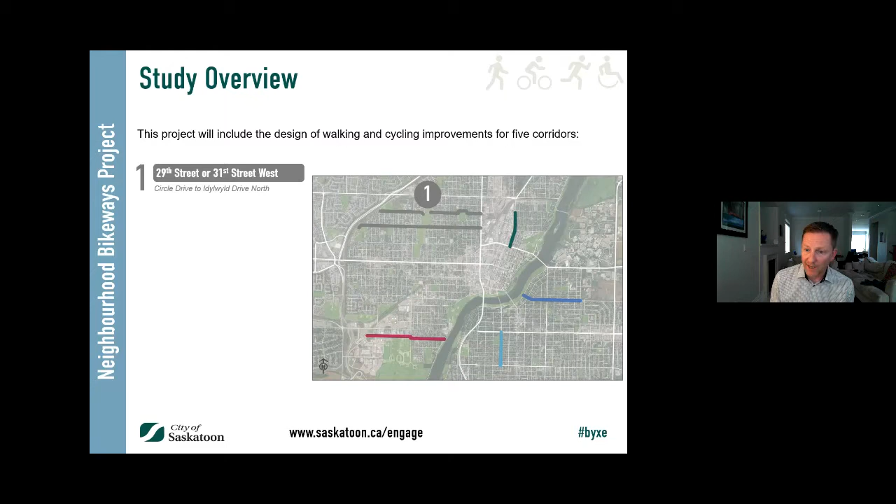The overall Neighbourhood Bikeways project includes 5 corridors that were identified. They include 29th Street or 31st Street West from Circle Drive to Idylwyld Drive, Dudley Street, the subject of tonight's event, from Dawes Avenue to Spadina Crescent, 3rd Avenue North from 25th Street East to 2nd Avenue North, 14th Street East from Saskatchewan Crescent to Cumberland Avenue, and Victoria Avenue from 8th Street to Taylor Street East, which is being designed by city staff.

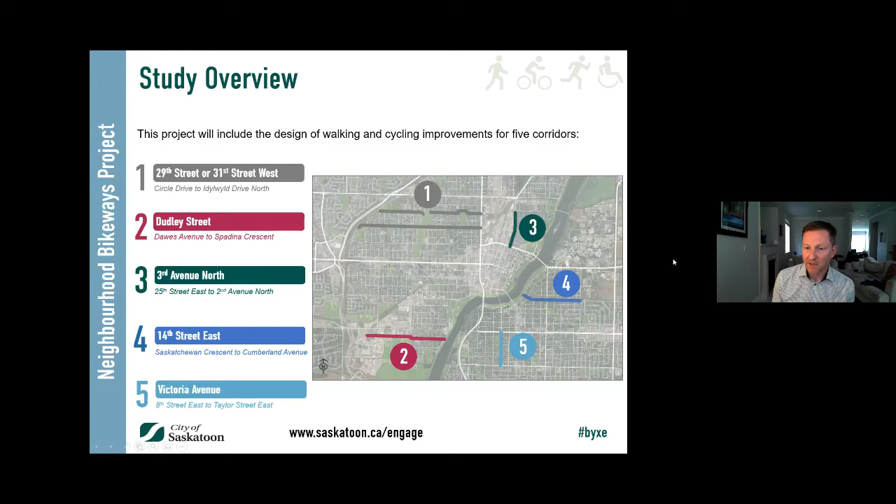So we are starting with the Dudley Street corridor through this process, and we will be proceeding with engagement on the other corridors based on feedback received tonight from this event over the next month or so.

This study is being completed through 5 phases of work, including a review of existing conditions and public engagement conducted in the spring, February and March, to obtain input on concerns and key considerations. Based on that input, we've developed conceptual designs for each of the neighborhood bikeways, which is now complete. The purpose of this open house is to present the recommended concept for the Dudley Street corridor and to answer any questions you may have.

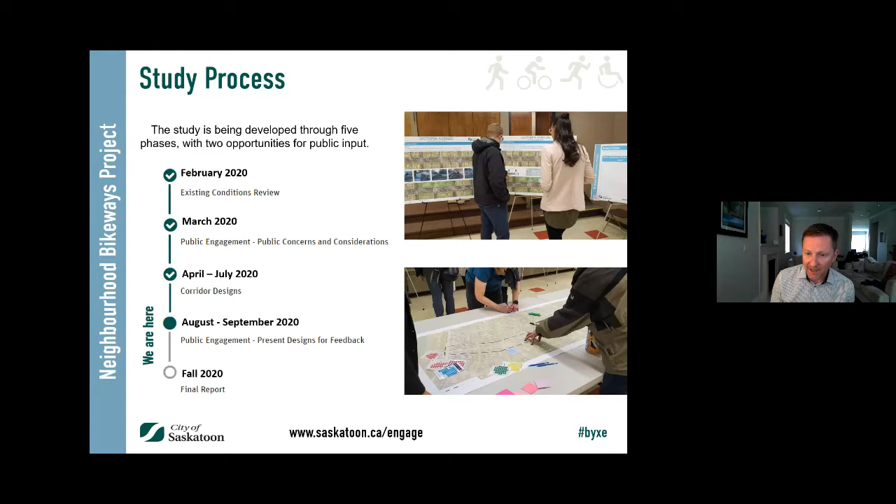Through the Neighbourhood Bikeways Project, we're looking at what we're calling all ages and abilities cycling facilities, or AAA cycling facilities. These facilities are intended to be safe and comfortable for all people walking and cycling, regardless of their age and ability. There are 3 types considered for each study corridor: protected bike lanes, multi-use pathways, and neighborhood bikeways. I'll explain the features of each on the next slides.

Protected bike lanes and multi-use pathways provide a physical separation between motorists and people cycling, which allows for safe and comfortable cycling even when traffic volumes and speeds are high. Protected bike lanes are typically used when physical separation is required because traffic speeds and volumes cannot be reduced adequately to provide an all ages and abilities facility. Multi-use pathways are typically built within parks, utility corridors, greenway corridors, or other locations where on-street cycling facilities are not suitable or desired.

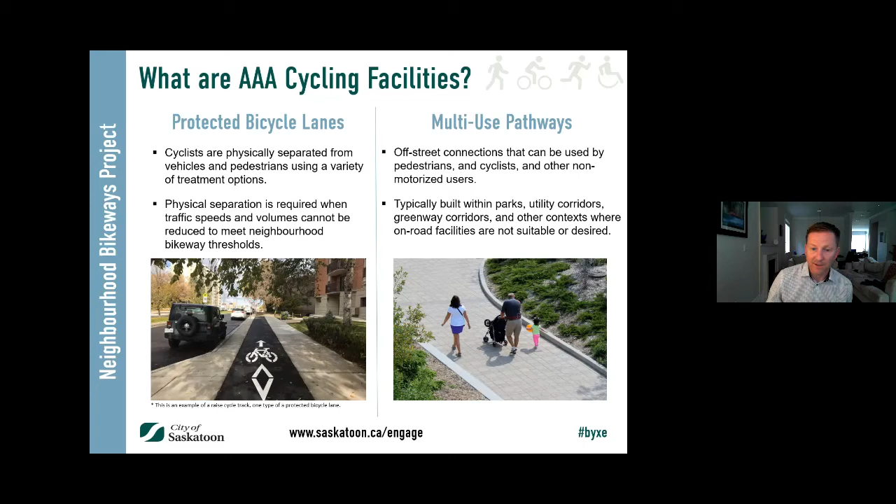Neighborhood bikeways are all ages and abilities facilities where design treatments are used to ensure low traffic volumes and speeds so that people walking and biking are more comfortable. Depending on existing traffic speed and volume, traffic calming measures may be required. Neighborhood bikeways do not typically impact on-street parking, as is the case with the Dudley Street corridor. I'll be discussing some of the design treatments for neighborhood bikeways throughout the presentation as we discuss the key considerations and design features of this corridor.

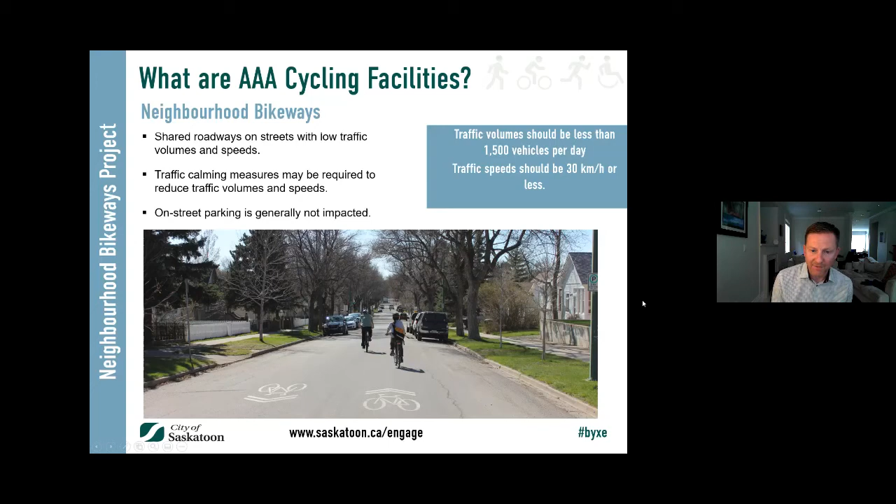I'll start with a summary of existing conditions of the Dudley Street corridor. Dudley Street runs east-west between Dawes Avenue and Spadina Crescent, providing an important connection between the Meewasin Trail and the multi-use pathway on Dawes Avenue, which connects to 11th Street West, a parallel east-west corridor just north of Dudley Street. This corridor provides important connections including to the Gordie Howe Sports Complex, St. John School, and the industrial employment areas.

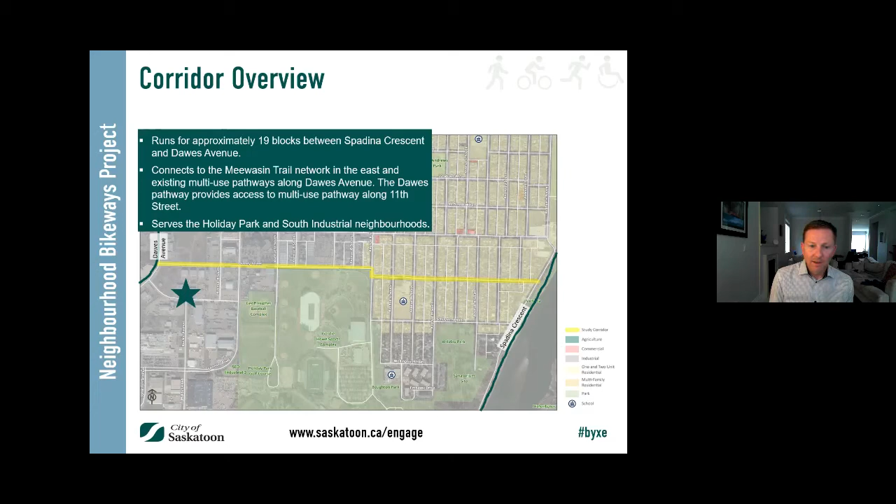The next slide summarizes some existing conditions along the corridor for pedestrians, transit, and on-street parking. The top map shows that much of the corridor today does not have sidewalks, so there's an important opportunity to improve conditions not only for people cycling but also for people walking. There are multi-use pathways found on both ends, on Dawes and Spadina with the Meewasin Trail, so this provides a great opportunity to connect those two existing multi-use pathways.

The middle map shows transit along the corridor and recognizes there's one transit route that runs westbound for a small section between Avenue P and Avenue W. Finally, the bottom map shows existing on-street parking utilization along the corridor. Parking is currently allowed on both sides of the street throughout the corridor, and we found that parking utilization is generally low throughout the corridor during most times of day.

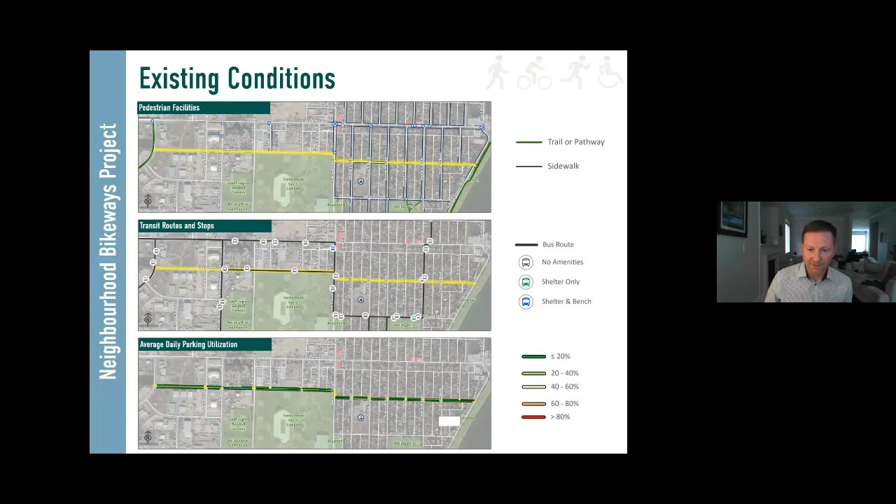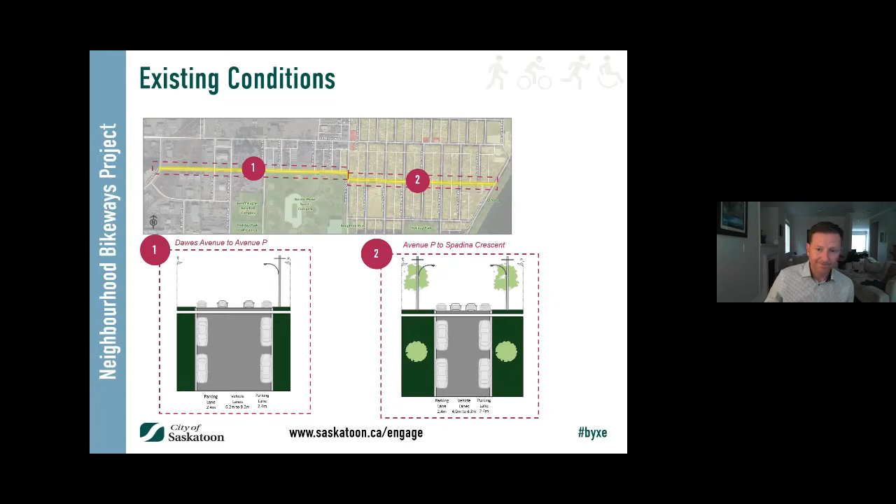Through the first round of engagement, we asked a number of questions from the public, including identifying opportunities and challenges and what could be improved along the corridor. Some of the themes we heard included opportunities for multi-use pathways and sidewalks to improve pedestrian safety, improved road surface conditions, more street trees, more lighting, better snow removal, better signage, and improved connections to Montgomery via the 11th Street West multi-use pathway.

And I'm seeing, I'm having some connection issues with my screen here. So, just see if I can switch my camera.

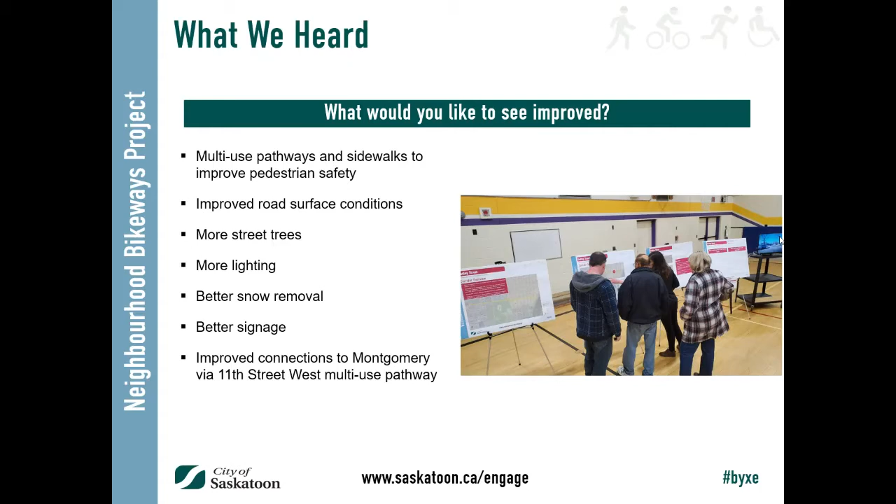Here we go. Okay, so in terms of the recommended concept, based on what we heard throughout the first round of engagement, we're recommending distinct features for the western and eastern ends of the corridor.

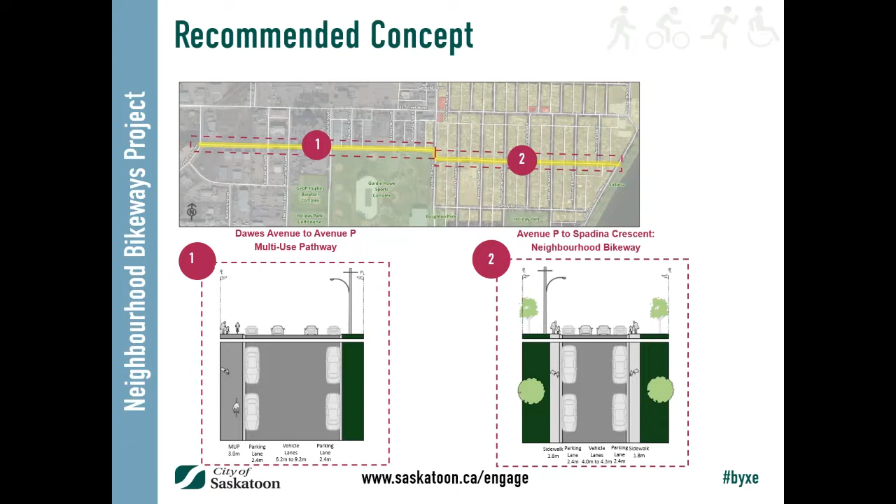On the west side of the corridor, the recommended concept includes a multi-use pathway on the south side of Dudley Street between Dawes Avenue and Avenue P, as shown in segment 1. On the eastern segment of the corridor, shown as number 2 on the map, we're recommending a neighborhood bikeway between Avenue P and Spadina Crescent. The next slides will show a little bit more detail about these treatments.

The next slide zooms in a little bit more so you can see the features of the west side of the corridor, between Dawes Avenue and Avenue P. In this segment, we have a multi-use pathway to improve safety and comfort for both pedestrians and cyclists. The multi-use pathway is generally 3 meters wide. With this design, parking would remain on both sides of the street as it is today, and vehicle access would not change, with 2 lanes of travel as it is today.

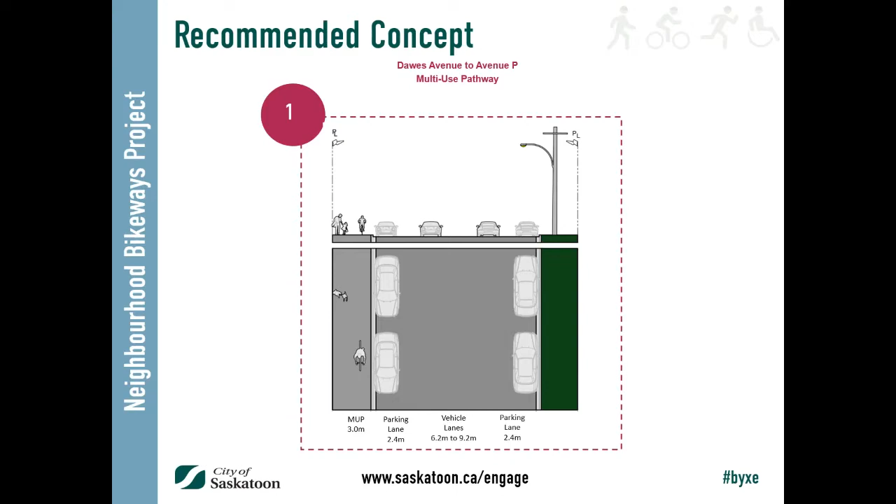On the east segment of the corridor, between Avenue P and Spadina Crescent, a neighborhood bikeway is recommended. With a neighborhood bikeway, there are no actual changes to the cross section of the roadway. Parking would be maintained on both sides of the corridor, and traffic would remain as it is, with vehicle traffic allowed in both directions. The focus instead is providing traffic calming treatments to reduce traffic speeds and volumes, with features such as raised crosswalks, curb extensions, and pedestrian activated signals, improving conditions not only for cyclists but for pedestrians.

The concept also includes some new sidewalks, traffic calming, and new crosswalks throughout the corridor, which will also help improve safety for children traveling to St. John's School.

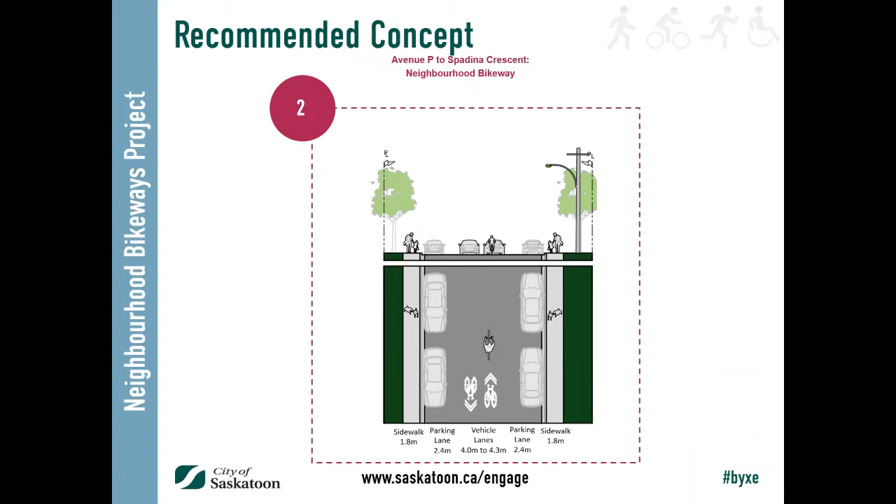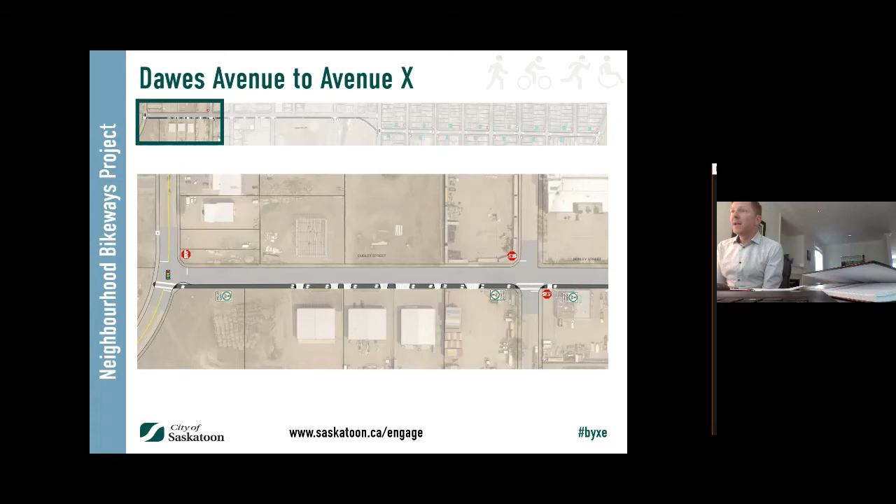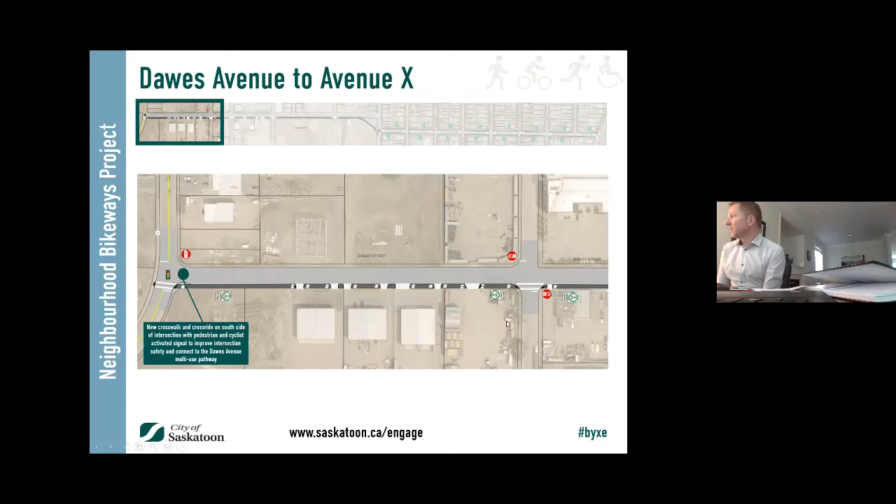On the following slides, I'll walk you through some key features of the corridor moving from west to east, starting at Dawes Avenue. Here, we are proposing a new crosswalk and a cross ride on the south side of the intersection, along with a pedestrian and cyclist activated signal to improve intersection safety and connect to the Dawes Avenue multi-use pathway, as you can see in the enlarged image there.

Throughout the west section of the corridor, between Dawes Avenue and Avenue P, the concept includes a 3-meter multi-use pathway on the south side of the street. There's a number of driveways along the corridor, so the multi-use pathway will transition to street grade through the driveway sections, but will maintain a curb separation and pavement markings to highlight crossing points for all.

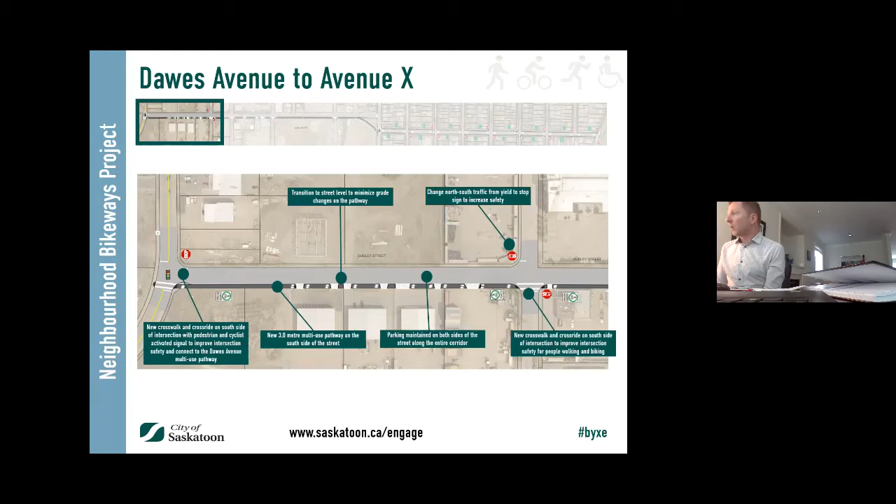Parking is maintained on both sides of the street for the entire corridor. A number of streets have yield signs along this corridor, and the concept involves changing these yield signs on the cross streets to stop signs at many of the north-south locations to improve safety. Finally, a new painted crosswalk and cross ride will improve safety for people walking and biking across Avenue X.

On the next slide, continuing further east, we move from Avenue X to Avenue U, with some very similar features. Parking is maintained on both sides of the street in this section, the 3 meter pathway continues, and the yield signs on Avenue U are changed to stop signs, with a new painted crosswalk and cross ride added.

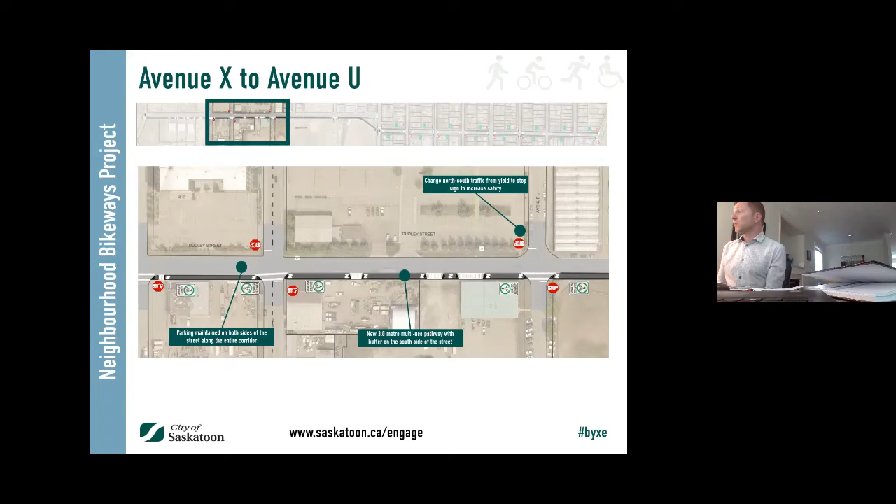As we continue further east from Avenue U to Avenue Q, similar design features apply. Parking is maintained on both sides of the street, the 3 meter multi-use pathway continues, and a new painted crosswalk and cross ride will be added.

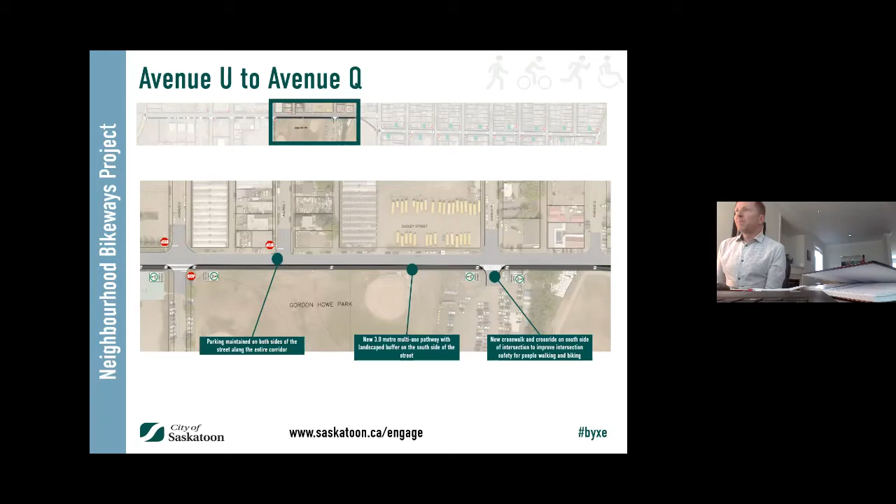Between Avenue Q and Avenue P, this is where we see the concept transition from the multi-use pathway to the neighborhood bikeway. In this segment, adjacent to Gordon Howe Park, the 3 meter multi-use pathway will transition through the park to simplify the crossing to and from Dudley east of Avenue P.

This involves adding curb extensions with a pedestrian and cyclist activated signal at Avenue P to improve intersection safety, and relocating the east-west crosswalk of Avenue P from north of Dudley Street to connect directly with the multi-use pathway.

This segment also includes adding new sidewalks to improve pedestrian safety along Dudley east of Avenue P, pending further feasibility evaluation. It also includes new raised crosswalks to improve safety of children walking or biking to St. John's School and to reduce vehicle and cyclist speeds.

As with the remainder of the corridor, parking is maintained on both sides of the street throughout this segment. As we continue further east, we see similar design treatments.

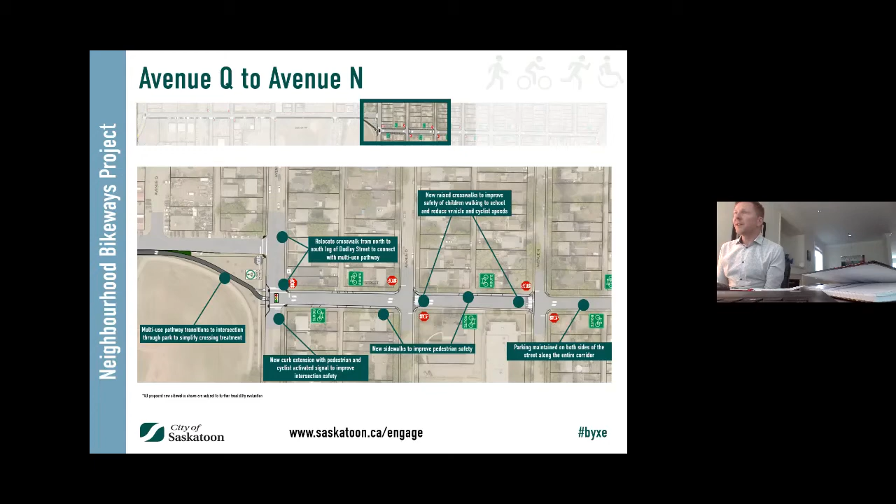Finally, between Avenue K and Spadina Crescent, we would see similar treatments. Yield signs, again, would be changed to stop signs. New sidewalks would be added pending further feasibility evaluation. On-street parking continues to be maintained on both sides of the street, and new painted crosswalks would be added at Spadina Crescent to improve safety and transition to the Meewasin Trail.

So those slides summarize the key design features. We'll move into a Q&A and welcome any questions participants might have in the chat, if we have any.

Not seeing any questions. Maybe I'll pause a moment and see if anybody has any questions or comments about the design.

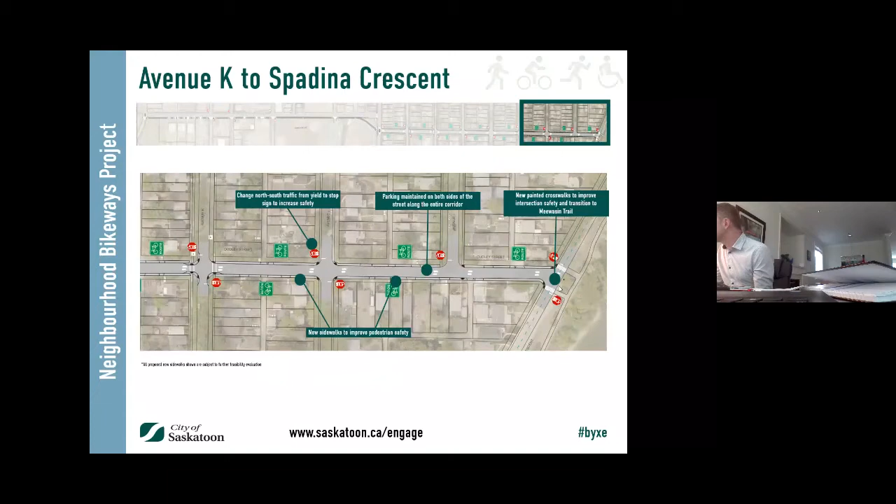There's one question: will the crosswalks at Spadina be cross rides as well? I'm just going to open the design, or we could flip back to that image just to show that segment, so anybody watching can kind of see this piece here.

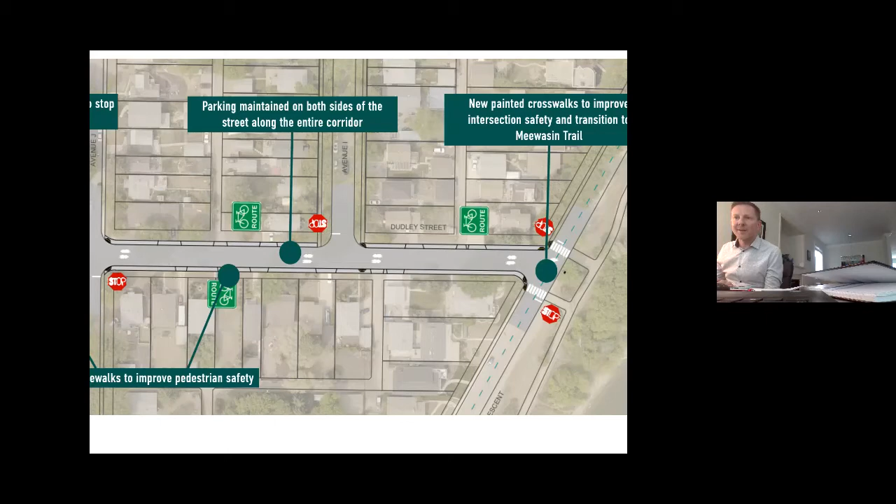And perhaps, it does look like the design shows crosswalks. Maybe I could invite some of our technical team members here as well. Brent is helping here as well. Can you confirm that? Yeah, thanks for the question.

So we're not showing cross rides just because we're transitioning from a neighborhood bikeway to this shared use path on the Meewasin Trail. So we would be looking at not trying to direct cyclists onto the sidewalk. Also noting that Spadina Crescent is going to be closed to vehicle traffic in the future, and traffic volumes are expected to be very light. So at this time, we're not showing cross rides in this location.

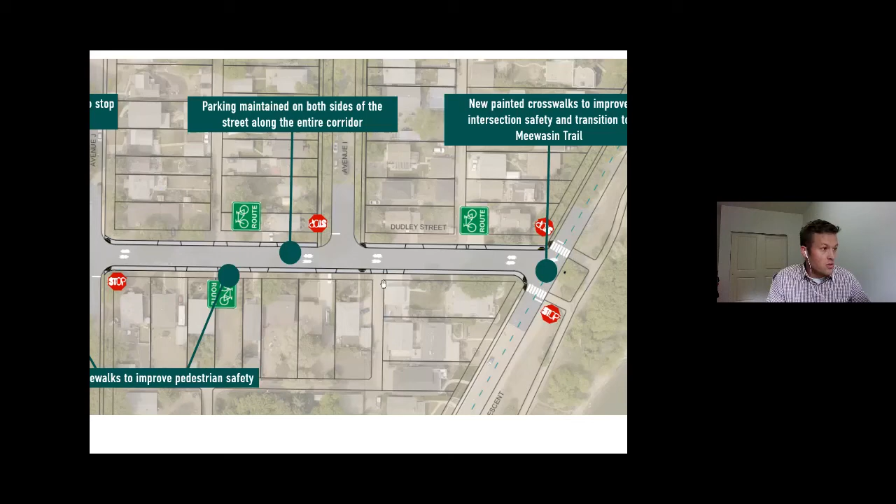And then there's another question about the stop signs at Avenue K and Avenue U. So Avenue K, the intent is to switch the stop signs so that Dudley has the right of way, noting that there's lower traffic volumes on Dudley, and that creates a continuous stretch for people who are using the neighborhood bikeway.

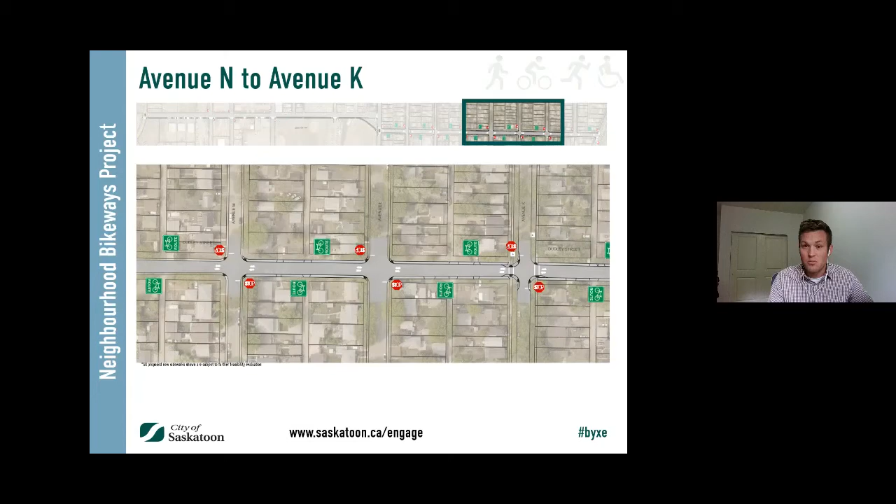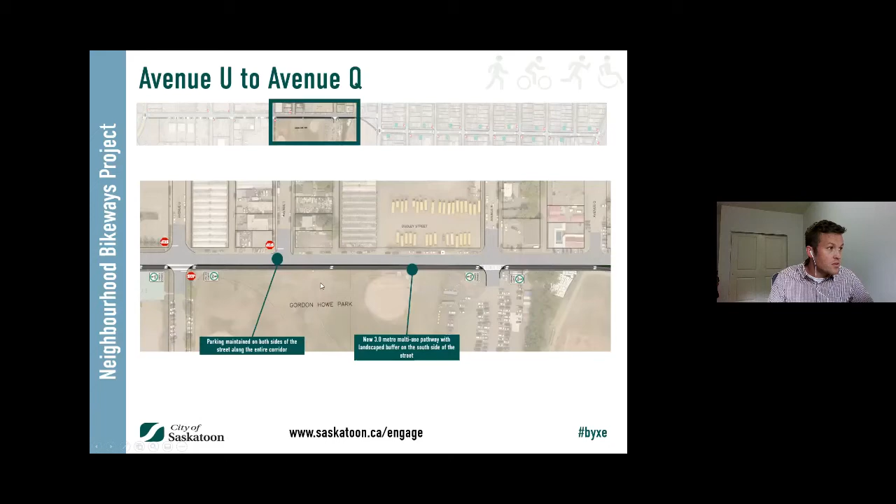Avenue U I will go to as well. I think that Avenue U is currently yield signs, and the design is proposed to go from yield control on Avenue U to stop control. So hopefully that answers your question. And I'll send it back over to Brian.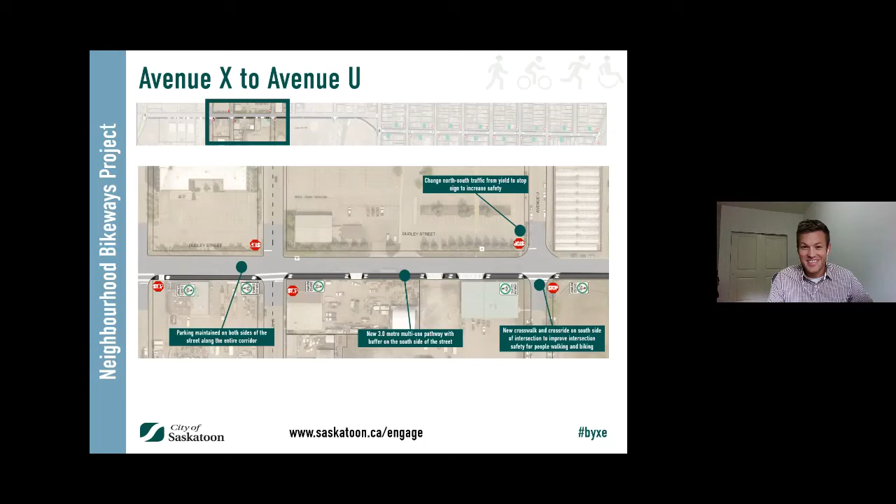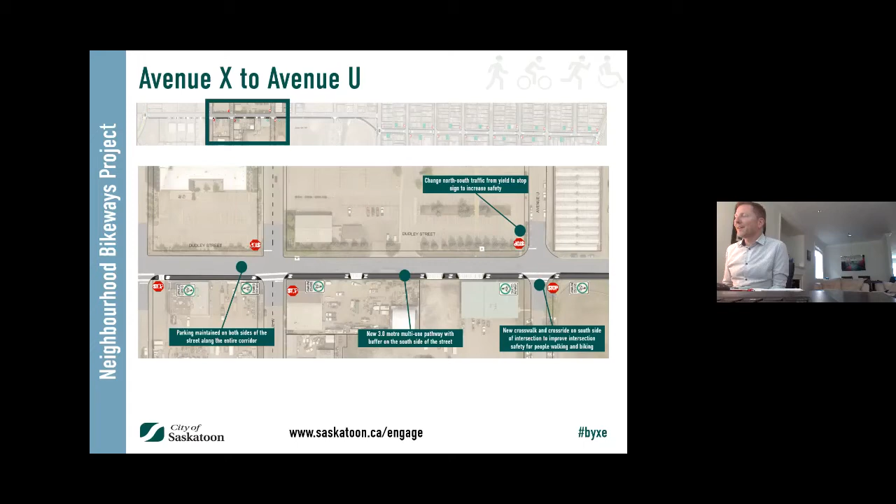Thank you, Brent. Hopefully that helps answer questions. Overall, with stop signs along the corridor, one of the key features of a neighborhood bikeway is to prioritize cycling movements. Often the treatment used for neighborhood bikeways, if there are stop signs that might be inconvenient for cyclists, is to reorient those stop signs so they're for the cross streets, so cyclists can continue along the corridor unimpeded. That's where other features in the design, like raised crosswalks and curb extensions, help manage that, ensuring traffic volumes and speeds still stay low with that treatment.

Hopefully that helps. As I mentioned, a number of traffic calming treatments throughout this east segment of the corridor are really intended to create a more comfortable space for people cycling and walking. It's already relatively low volume, but it's a great opportunity to improve walkability with sidewalks, especially with St. John's School along the corridor and a number of parks in the area. We think it's a great opportunity to make it a great street to walk and bike along.